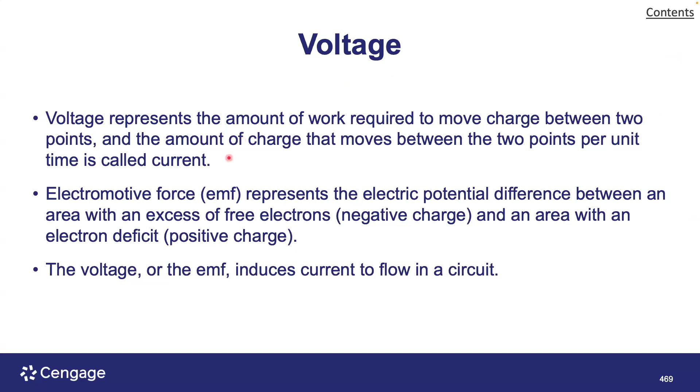If I have this charger going into a USB-C connection, that specifies a certain amount of voltage. But looking around the room at different types of computers plugged in, they may or may not be the same voltage. So we can see different kinds of voltages used for one application or another.

Direct current is the flow of electric charge that occurs in one direction. Direct current is typically produced by batteries and direct current generators. Alternating current is a flow of electric charge that periodically reverses, going positive and negative. The time interval between the peak value of the current on 2 successive cycles is called the period.

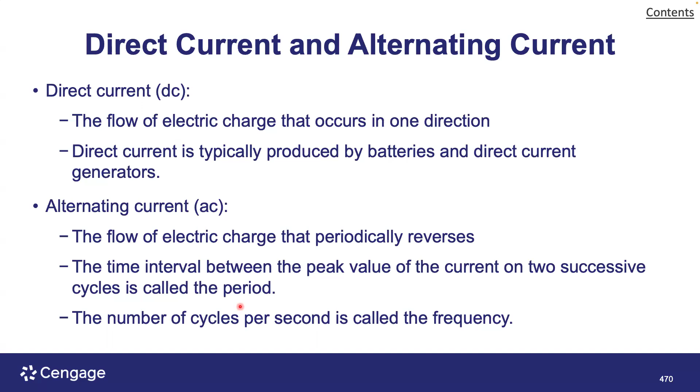Does anyone know what the frequency is for AC electricity here in the United States? It's 60 hertz. Anybody have a guess what it might be in Europe? They actually use 50 hertz. That just gives you an example of some of those numbers, and for this audience it's okay that those aren't known.

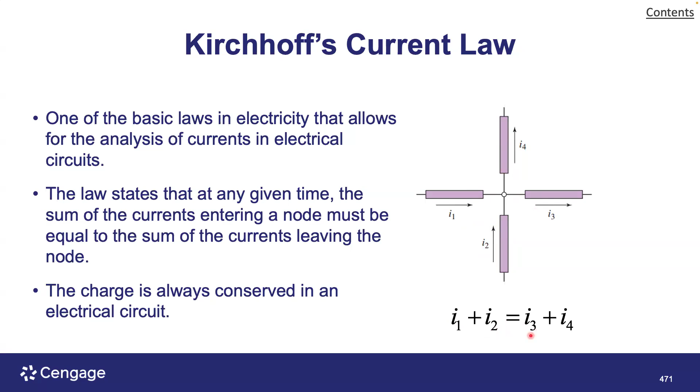I'm just going to skip over this. Basically it's showing the conservation of current. If you go to an intersection, I1 may not be equal to I3 and I2 might not be equal to I4, but these combinations would be the same. So that's just a little bit of information about that.

In terms of electrical circuits and components, here are examples of some you might be familiar with. I think everybody's seen wires, even if they're just in the background in your home or computer. A switch, so you can turn things on and off; when I come in the room, I turn the light switch on. Outlets are where you plug devices in; I plugged my laptop into one.

I mentioned resistors and capacitors; those are common. There's also the inductor, another component with another set of characteristics on how it handles current. A resistor resists current. When you turn the water faucet on higher and higher, there's less resistance, so more water flows. The higher the resistance, the more it prevents current flow, like turning the faucet off.

A capacitor stores charge. I tried to give an illustration of what that might look like here. So what was that?

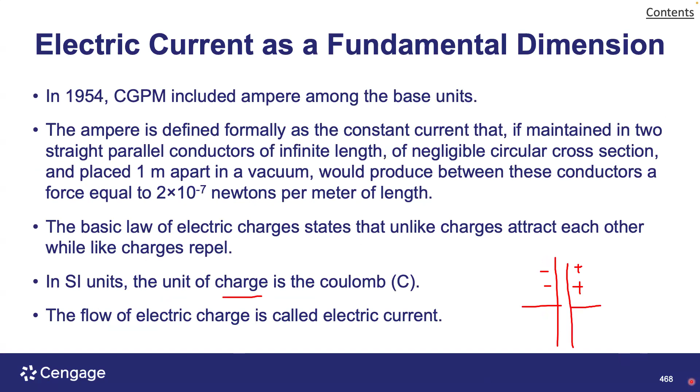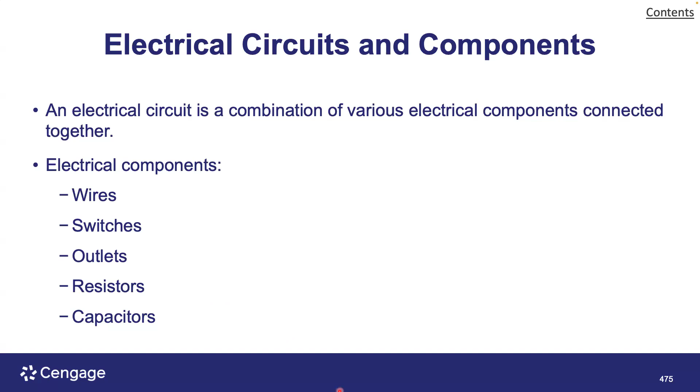Just trying to show you two plates, and it doesn't necessarily allow current to flow, but it stores it up. When you have alternating current, what that does is it's trying to go one way, and then it's going to store up on one side, and it's going to go the other side, and it's going to store it up in the other. So it's actually going to have some interesting characteristics in terms of what it's going to do overall.

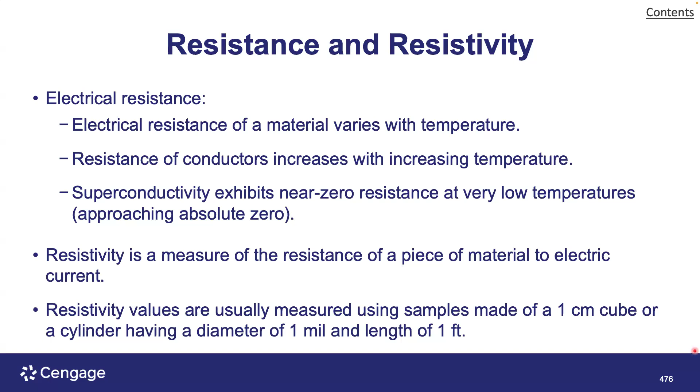So I already gave you an idea of thinking about resistance. And so just think of it resists. That's the key part of this, is resisting what is allowed in terms of the electrical current. And the general relationship for this is, I'm used to having it V equals IR, but V equals RI. R stands for resistance, I stands for current, V stands for voltage. And so that's the relationship between those ideas.

There's something called the wire gauge. And so maybe like an 18 or 24 gauge, really small, getting to larger wires. And so this is just the system in which they specify different things. So if you had some home improvements, the contractors would have to go and use different gauge wires for different things. And so if it requires a lot more current to go through it, that wire is supposed to be bigger so it doesn't overheat. It has the real estate, if you will, to be able to handle that.

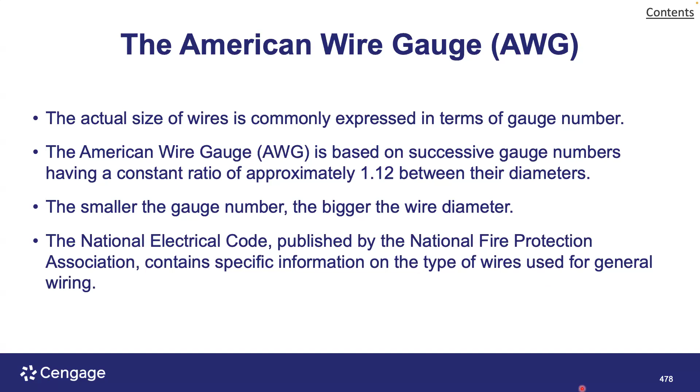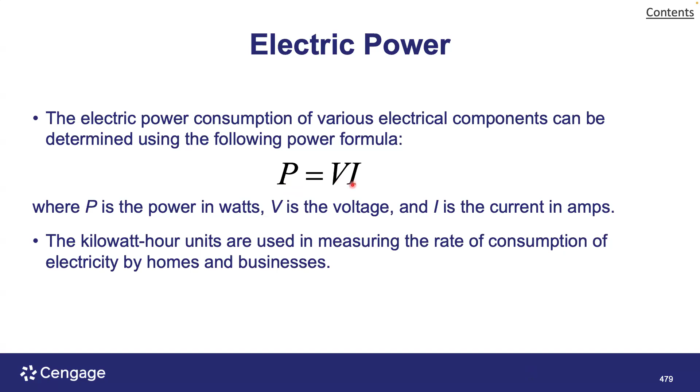There's also electric power, and the relationship is power is equal to voltage times the current, VI. And so that's another relationship that's out there. So basically, this is something that we all use, going from our cell phone to our appliances. And now my wife and I have a solar and battery system in our home, a solar power system.

Kilowatt hours is another way of talking about power. It's power times amount of time. And so it's energy. It's just telling how much energy is utilized for any particular time. So the annual electrical consumption is somewhere between 4,000 and 10,000 kilowatt hours for a typical home in a year. And so if you break that down, that can give you what it would be on average for a day.

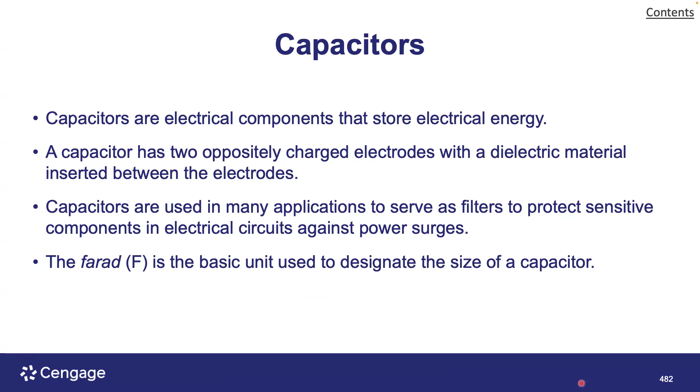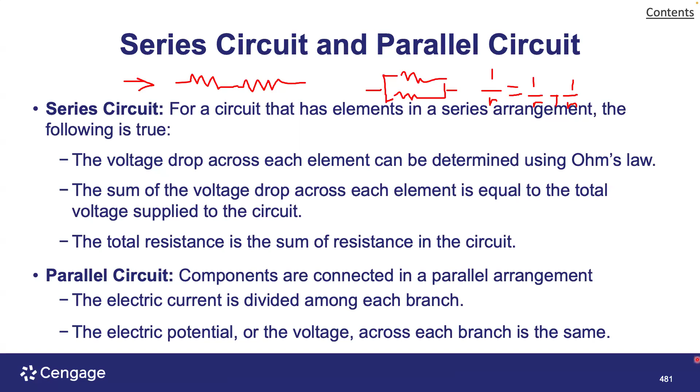Capacitors, they store charge. The farad is a unit that's used for that. So this just gives you another example. For the folks that are computer science, you probably aren't going to bump into this, but I'm just trying to give you a sense of the types of units and things that we have in this chapter. So what I showed you, the difference between series and parallel here, is for resistors. It's the opposite if I was to show you that for capacitors, but I'm not going to get into too much detail. So maybe just think about it at a higher level.

And so if I was to try and think of things in our home, let's say, for example, I have a refrigerator, I have an air conditioner, and any other device you want to say that I would include for giving you a sense of what I'm trying to talk about here? What's a common device that you use that you might want me to put down here? Anybody want to give me an idea?

TV? Okay. So what happens when you go to the power company is all of these things are in parallel. So that means that the total resistance is less with these three things being in parallel. So it means it's going to draw more current. That's the idea, giving you a sense of what's going on. So thus, we can see the impact of putting things in parallel.

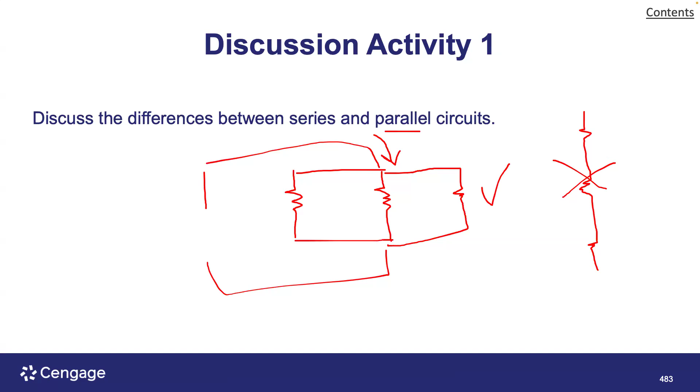If I put them in series, what's going to happen is these things aren't going to work because each one needs a certain amount of voltage for them to work. And so it's going to get smaller and smaller and smaller. And so if I think like a home application, that's not going to work. But if I have the ability to get more current to come through this, and the power company has it available, then this is an example of something that would work. Does that make sense? So just wanted to keep things at a higher level to be exploring that.

So what about electric power sources? First of all, batteries. I see most of you guys are on battery power with your laptop. So the battery is using a chemical reaction to produce the energy that you're using for your computer. And so guess what? Over time, it's only good for so many hours. And then it's going to just shut down your machine, or it's going to give you a warning a little bit before that says you need to recharge.

So the circuits create paths for the electrons to flow. Okay. And so it's trying to mimic, at least for a laptop, when you're plugged in, the same as when you have it going on battery. When it's turned off, there's no path. And so there shouldn't be any reduction in the power for the battery. But since it is a chemical reaction, they will start to discharge a little bit over time. If you've ever had a laptop in your closet for a while and you pull it out and you haven't used it for a while, it's still going to lose some of its charge. So it's chemical compounds. All of those are the things that are part of a battery.

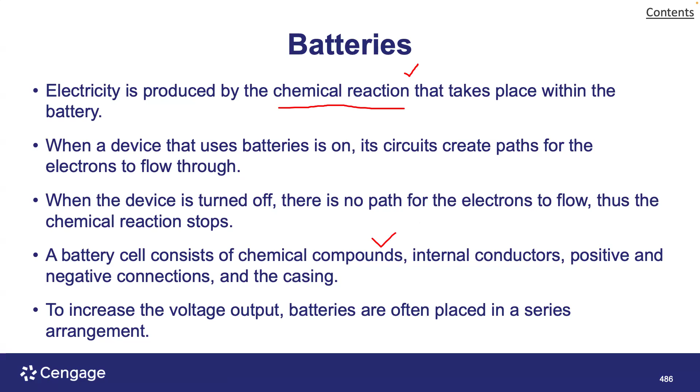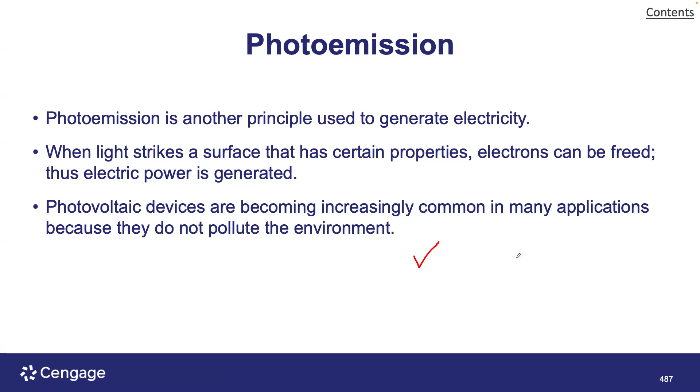Photoemission. So just think of your solar panels as an example. So when the light hits the surface, it engages with the solar panels and it starts to produce a current. And this is something that can be used to operate a home. Like that's what we have. And so during the day, we get good solar production. Then as it gets towards the evening, it starts to go down and eventually you run out. And so you either have to use things from the power company, or what we have is a battery and a solar panel combination that we could literally, if we wanted to, go off the grid.

There's other forms of energy, wind energy, turbines. It's common in different parts of Europe where they have steady trade winds. And so they just take advantage of that. Different places in the United States, they'll have wind farms that are utilized. For folks that are near a river or a dam like Hansen Dam, and there's overflow, they're trying to maintain the level of water, so they do let some water through, and so they can actually generate electricity by having that water pass through turbines. Those turbines are connected to a device that produces power from that.

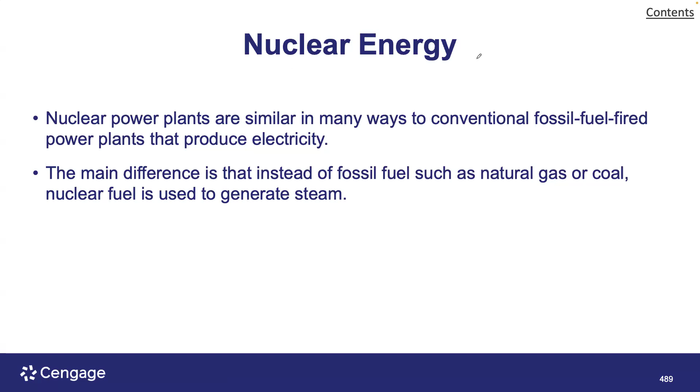And plus there's power plants. So water is used in steam power generators to produce the electricity. So they warm up the water that goes through these turbines and it produces electricity. Finally, nuclear energy. There was a power plant between San Diego and Orange County, and they just recently started the process of decommissioning it. It can actually take a long time to decommission it. So the San Onofre plant, if you've ever seen that, in front of Camp Pendleton. So those are a couple of different types of energy that are available.

Wind energy is a form of what? Anybody have an idea? Yeah. So you're turning a turbine and it's generating electricity. Okay, electric motors. So motors drive many devices and equipment that make our lives comfortable and less laborious. Some household appliances with motors are refrigerators, garbage disposals, microwaves, I mentioned TVs.

So microwaves with a turntable, stove hood with a fan, it goes on and on and on. And so there's different types of motor types. Selecting a motor for an application depends on several factors, including the speed of the motor, the power required, and

the type of load. The duty cycle: manufacturers of motors classify them according to the amount of time the motor needs to be operated. The motors are generally classified as continuous duty or intermittent duty.

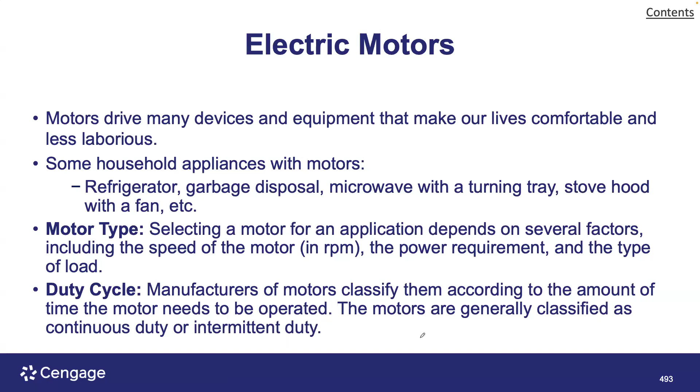So let's play this video and then we'll have a discussion about it and see if you have any observations from what you saw. So this is about the Tesla cars.

Anybody seen a Tesla car running around as you drive? They're quite common here in California. And so go ahead and play this.

This is Nikola Tesla, the greatest inventor of all time, and this is his greatest invention, the AC induction motor. In the early 21st century, modern inventors like Elon Musk started putting these AC induction motors into electric cars. From this, Tesla Motors was born.

Elon Musk's Tesla has been constantly improving on that century-old design, from their Model S to the Model 3 and on to their next generation electric car that has yet to even be released. This is how Tesla reinvented the electric motor.

The AC induction motor is a product that goes back to the early days of Tesla Motors and the development of their first roadster vehicle. But in the grand scheme of things, the induction motor actually tracks its origin back to the early days of the Industrial Revolution. Alternating current is the kind of electricity that surrounds us on a daily basis. It's what comes out of the sockets in your wall and moves through the power lines up and down your street.

Nikola Tesla is widely considered to be the father of alternating current electricity and was a pivotal figure in adopting AC to power the US electrical grid around the turn of the 20th century.

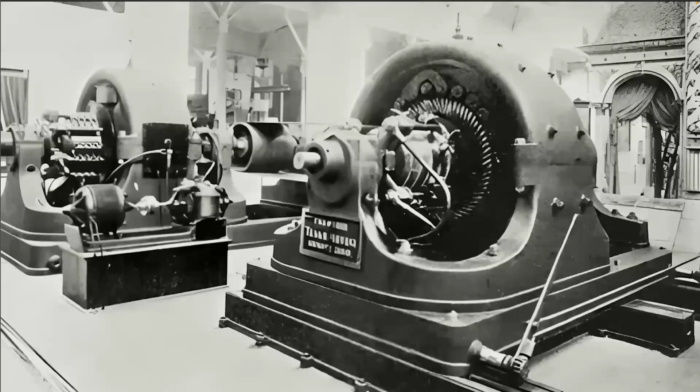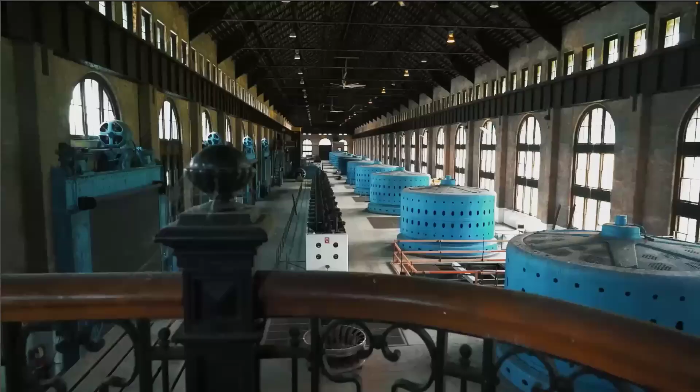Many people consider Tesla's greatest invention to be the alternating current induction motor, essentially a device that will transform AC electricity into mechanical motion, and in turn, when used in the opposite direction, an induction motor can turn motion into electricity. One of the first large-scale applications of Tesla's AC generator was capturing hydroelectricity at Niagara Falls.

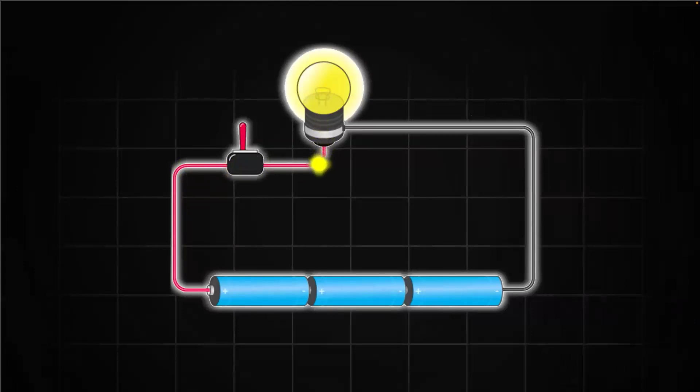When we say alternating current, we are really talking about the direction that electricity is moving through a circuit. So for AC electricity to work, the direction of the electric current has to continuously alternate between forwards and backwards. This is a bit difficult to imagine in the context of our own electrical grid.

As far as we can tell, electricity flows out of the generating station and into our house, but in reality, it's in a constant state of movement back and forth. This is a characteristic that allows AC electricity to be transmitted at high voltages over very long distances and then converted into lower voltage for final delivery to the consumer.

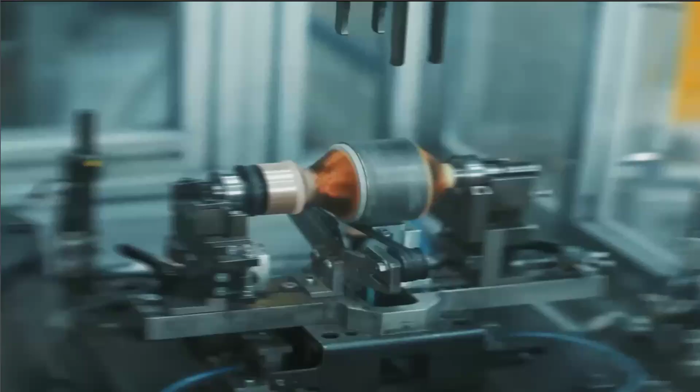The alternating flow happens so fast that we only perceive the electricity as constant, but in reality, the direction of electricity alternates 60 times per second in North America. So how does this apply to electric motors? Well, it's all about magnets.

So when you transmit electricity through a conductive material like a copper wire, you also create a magnetic field in that wire. This is an electromagnet, and once you stop the flow of electricity, the magnetic field will also dissipate.

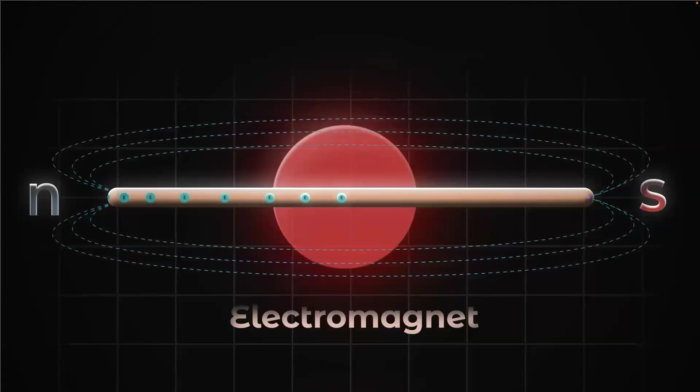Now, if you transfer electricity in one direction through a conductor, you create a magnetic pole, either a south pole or a north pole. And then if you were to reverse the flow of electricity through that same conductor, you would also reverse the polarity of the magnetic field. So as the direction of electricity alternates, so does the north and south pole of the electromagnet.

There are two essential components of an electric motor, the stator and the rotor. The rotor rotates and the stator remains stationary. Easy way to remember which is which. Now, as the name suggests, an induction motor uses a rotating magnetic field in the stator to induce a rotational force in the rotor. Here is how that breaks down.

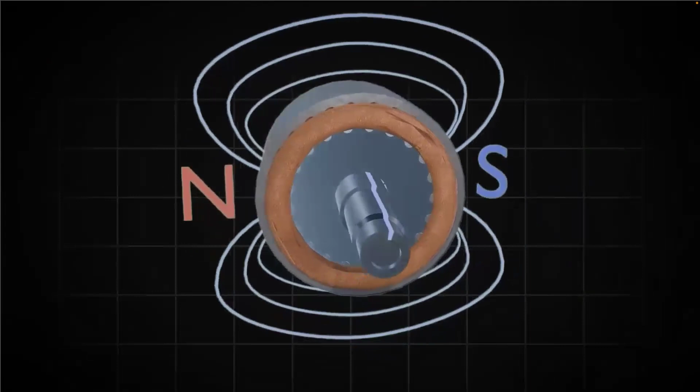Your stator is essentially a ring of copper wire that is arranged into coils that run from the front to the back of the motor. Each coil of wire is wrapped around a piece of iron, so when electricity is flowed through the coil of wire, it becomes a powerful electromagnet. The polarity of each magnet is determined by the direction of current.

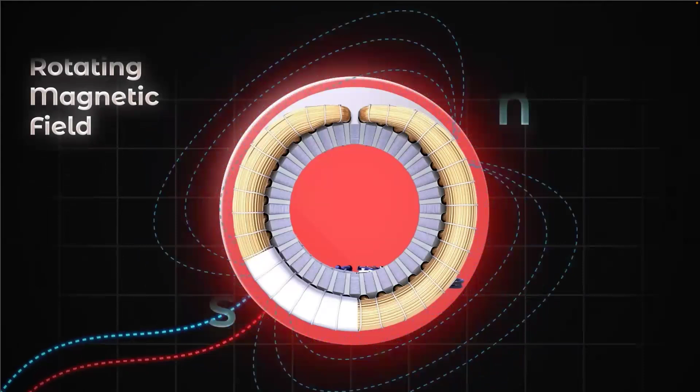So by alternating the directions of the electrical charge being applied to each subsequent winding and flipping each polarity in sequence, we create a rotating magnetic field that travels around the ring of the stator. The speed at which the magnetic field rotates can then be controlled by the rate at which you can alternate the flow of electricity.

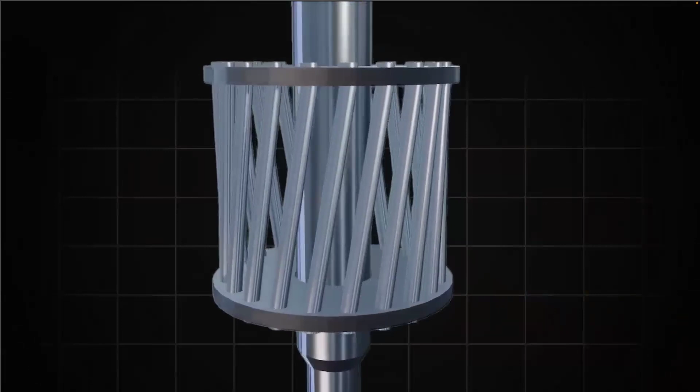The rotor in this case is a much more simple component. There are various different kinds of rotors used in different induction motor designs, but the one that we are going to focus on today is known as the squirrel cage rotor. It gets the name because the structure is a cylinder made from aluminum bars that run from the front to the back of the rotor with circular metal end caps.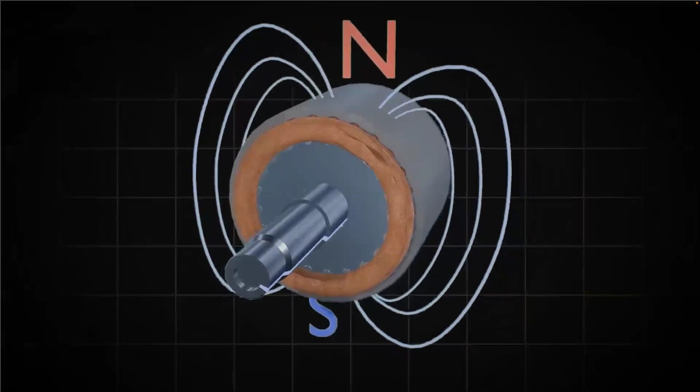There is no supply of electricity flowing into the rotor, and it contains no natural magnets. It's literally just a metal cage that can freely rotate, and yet the rotor can be transformed into a magnet by the rotating magnetic field of the stator. One of the interesting things about magnets is that as they move relative to a conductive material, they can induce an electrical current into that conductor, which in turn creates an electromagnet with no contact required, just relative motion. You can see this by dropping a magnet straight down a copper pipe.

As the magnet falls, it will induce a magnetic field into the pipe, which will then work against the magnet itself and slow the fall of the magnet through the tube. So the further it falls, the slower it will move due to resistance from the induced magnetic field in the copper pipe. The same thing is happening inside the induction motor. By rotating the magnetic field around the stator using alternating current and electromagnets, a magnetic field will be induced in the bars of the squirrel cage rotor.

That induced magnetic field will react against the magnetism of the stator. We know that magnets with the same polarity will push against each other, and this force of magnetism will cause the rotor to turn in the direction of the stator's magnetic field. So the faster you alternate the flow of current through the stator, the faster the rotation of the magnetic field, and the faster the movement of the rotor due to the magnetic push effect.

The only caveat we need to remember is that the rotor will have to move at a slower rate than the rotating field of the stator, because the magnetic field is created by relative motion. If the two are turning in sync, then there's no longer any of that motion in play. The rotor will demagnetize and slow down.

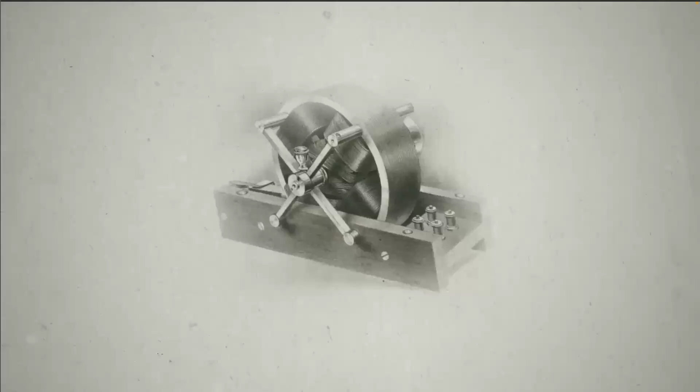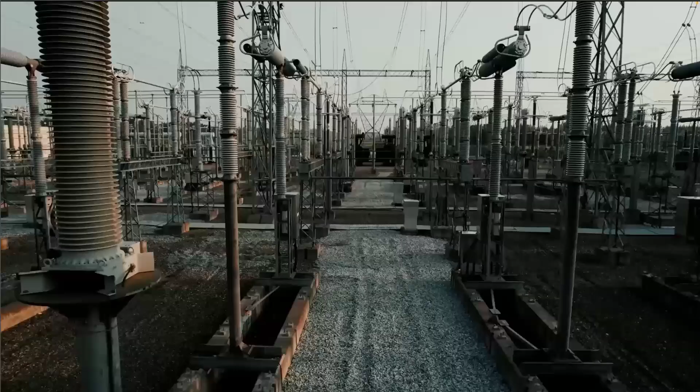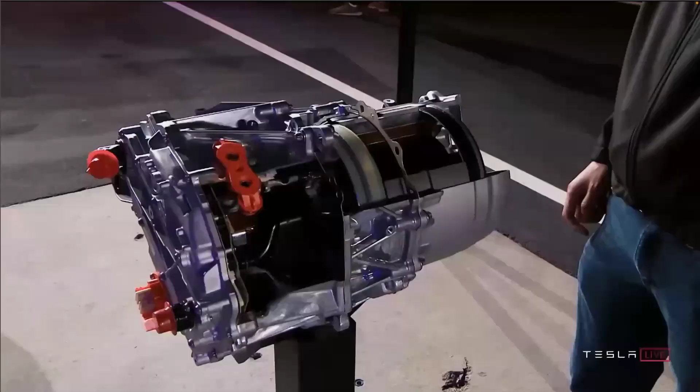From the time this induction motor was first patented by Nikola Tesla in 1888 to the present day, AC motors have been a staple of industrial society. We see them in everything from elevators and streetcars to ceiling fans and washing machines. Anything that plugs into the electrical grid and spins is more than likely to have an AC induction motor inside. So when it came time for Elon Musk and his crew of founders at Tesla Motors to choose a power source for their first electric roadster vehicle, there was one very obvious candidate, the AC induction motor.

And when used in an electric vehicle, the design gives you one significant advantage. We know that when you rotate the magnets of the stator faster than the rotor, you electrify the rotor and create a magnet. But when you spin the rotor faster than the stator using an external force like a wheel, you electrify the stator, which can then transfer the excess energy back to the battery pack and increase the driving range of your vehicle. This is how regenerative braking works.

Tesla retained the AC induction motor as their primary drive unit into the Model S and X. This allowed the relatively large and heavy vehicles to achieve mind-boggling feats of acceleration from a standing start, but they also came with a significant drawback that needed to be solved. So the beauty of the AC induction motor is its simplicity. Coils of copper wire, some chunks of steel and iron, a squirrel cage of aluminum bars, not much to it. And that's exactly why the motors in appliances like air conditioners and washing machines can run for decades without failure.

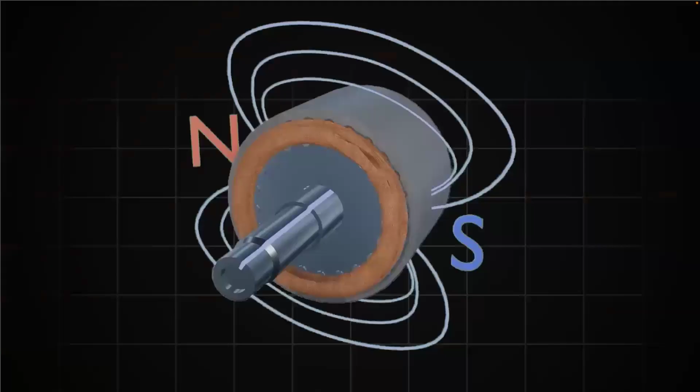The downsides of the original induction motor start to show themselves only when you go in search of maximum power and efficiency, which is exactly what Tesla was looking for when they designed their Model 3. Okay, so everything that we just talked about still applies to this new motor that Tesla created for their Model 3, but with one key addition: permanent magnets. Specifically, they added permanent magnets to the rotor.

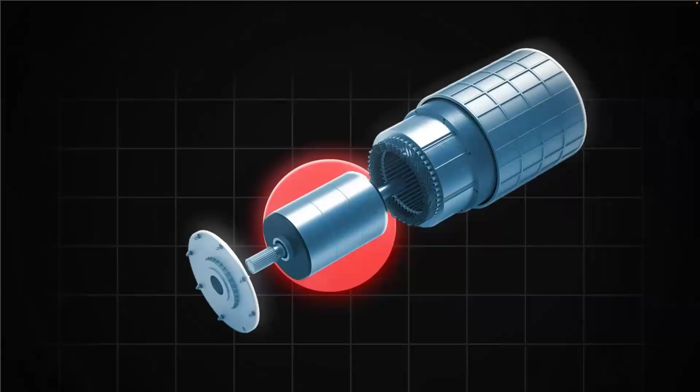So now, instead of an aluminum squirrel cage, we have this dense iron core filled with strips of a magnetic rare earth element called neodymium. The technical name for this new motor type is IPM-SynRM. That means internal permanent magnet synchronous reluctance motor. It's complicated. Here's the scoop. You could make a permanent magnet motor by taking a metal cylinder, sticking 4 magnets to the outside with south poles on the top and bottom and north poles on the sides.

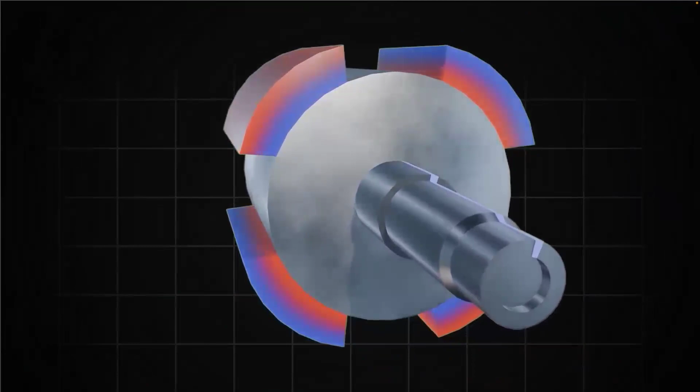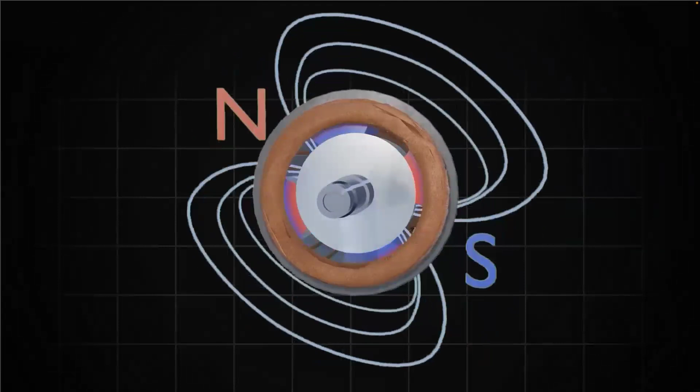That would be your rotor. And then when you stick that inside the stator that we talked about before and start rotating the electromagnetic field in the stator coils, your permanent magnet rotor will follow. Now we can actually spin the rotor at the exact same speed as the rotating magnetic field of the stator, because we are no longer relying on relative motion to induce the magnetism in the rotor.

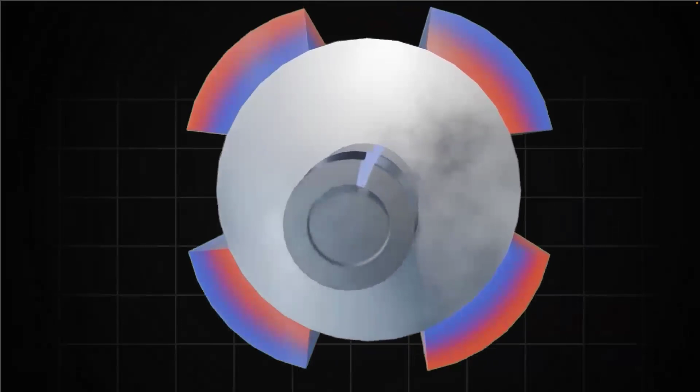This already gives us higher efficiency and more power, particularly when accelerating from a stop, because we have these two very powerful magnetic fields that can instantly push off from each other. But there's a big problem. Two problems, really. For one, permanent magnets stuck to the outside of the rotor will have a tendency to come unstuck due to centrifugal force, so the faster the rotor spins, the more likely it is to fly apart.

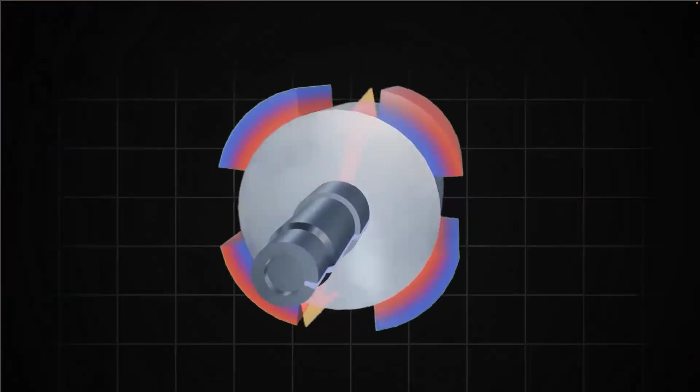But even more importantly, reason two, is that the rotation of the permanent magnets will start to induce their own magnetic field into the stator coils at high speed, and this is going to be opposite to the electromagnetic flow in the stator, and that force is going to want to slow down the whole system. This is called back EMF, and the faster the rotor speed, the more back EMF you get. To combat these two downsides, we introduced the design of a reluctance motor.

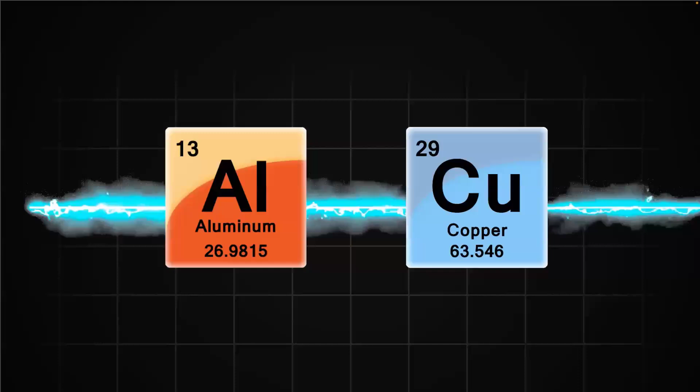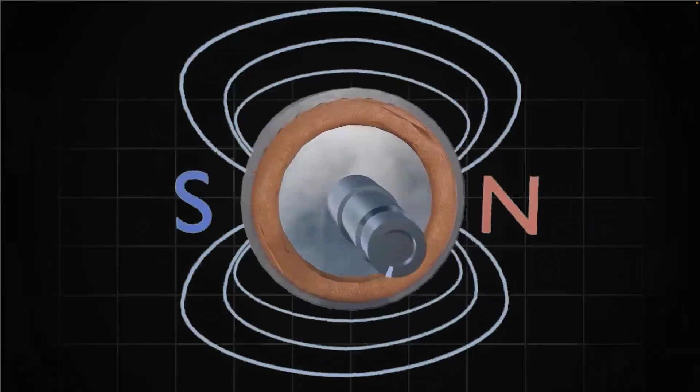So aluminum and copper are only magnetic when you flow electricity through them, but iron is naturally attracted to magnetic fields. So that means we can use it as a rotor material inside our same old electromagnet stator, and that iron rotor will follow in sync with the rotation of the stator's magnetic field. Again, there is one caveat. We need to cut channels into the iron material that line up with the shape of the magnetic field that surrounds it. This will align the magnetic reluctance of the iron core with the magnetic field of the stator and allow them to rotate in sync.

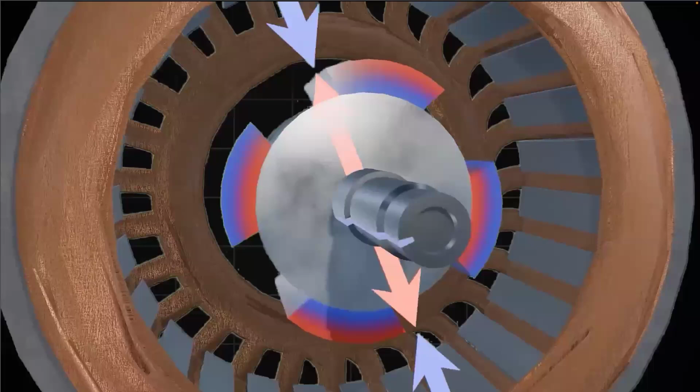This is our synchronous reluctance motor. It's a very efficient motor design, and it works very well at high speed because there is no back EMF created by the iron rotor. The downside here is that a reluctance motor has very low power density when accelerating at low speed because the rotor can only follow the rotating magnetic field of the stator. You don't get that instant push effect of two magnetic fields working against each other.

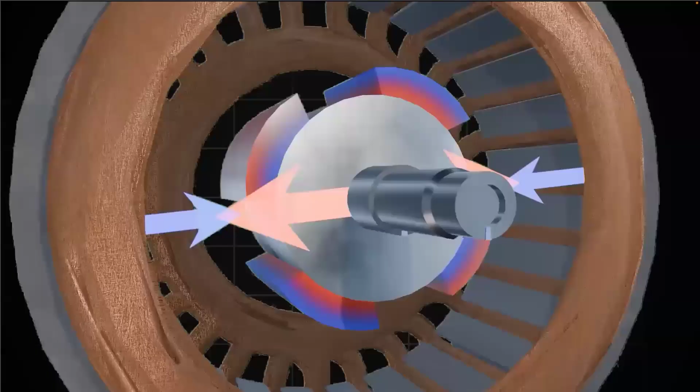Now, all we need to do is add magnets to the rotor and we get our perfect combination. Those channels that we cut into the iron core make the ideal location for our permanent magnets to live. This is our internal permanent magnet. By placing them inside the iron rotor, we reduce the permanent magnet's effect on the stator windings and thereby reduce the problem of back EMF.

Now, there is still a very complex task here that involves balancing the reluctance effect of the iron core with the magnetic push of the permanent magnets. You see, you want to utilize the power of permanent magnets during acceleration, but then cancel them out and switch over to the efficiency of reluctance at cruising speed. This is all handled by very advanced software controlling the magnetic field of the stator that we cannot even begin to explain. And this is why the IPM-SynRM motor was never widely used until Tesla came along. And now Tesla is about to take this design to the next level.

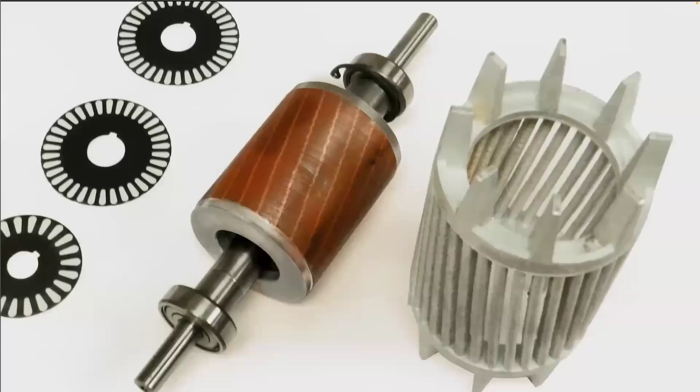With the motor design for the Model 3, Tesla was able to maximize both power and efficiency, but it did come at a cost. If we remember back to the original induction motor, it came with a relatively simple and cheap rotor made of aluminum bars. By switching to IPM-SynRM, Tesla introduced the rare earth element neodymium into their rotor. So the cost in this instance is money. It's a much more expensive motor.

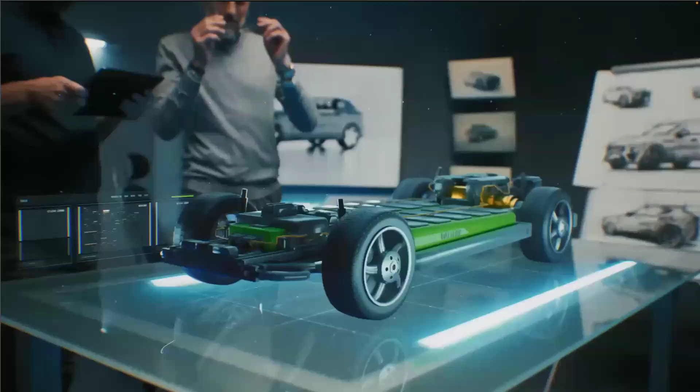Now Tesla is dedicating their research and development into a next generation vehicle platform that is supposed to dramatically reduce cost while maximizing efficiency. This will serve as the base for their upcoming robotaxi vehicle. From what we learned last year at Tesla's Investor Day, the designers are achieving much of that cost reduction by eliminating rare earth elements from the motor's composition.

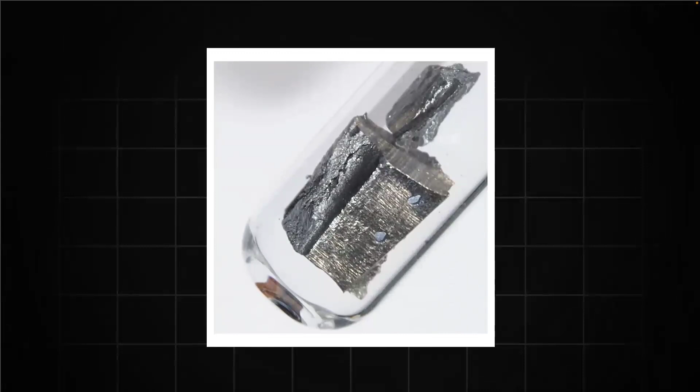Now, it's not that neodymium is particularly scarce in the overall composition of the Earth, but it is difficult to locate near the surface, and you typically won't find large concentrations all in one place, so therefore the cost is relatively high, and the supply is relatively low. But engineers still prefer neodymium for electric motors because it has a strong magnetic field that won't degrade over long periods of use.

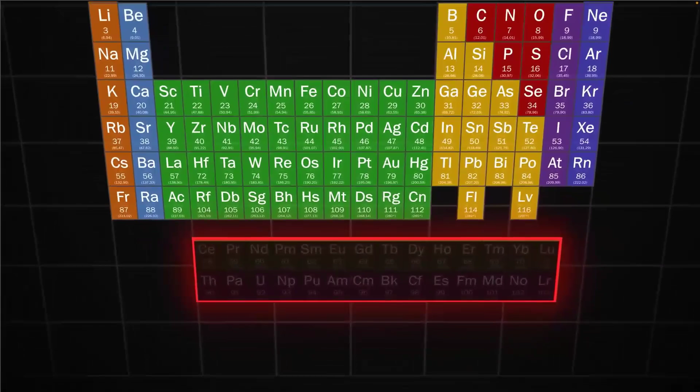So it does justify the cost. Now, Tesla is saying that they can get by without the need for any rare earth elements in their new magnets. So what will they use instead? A widely popular material for making magnets is called ferrite. This is a ceramic material of mostly iron oxide, also known as rust, combined with additional metals like manganese, nickel, and zinc, but it doesn't particularly matter which one.

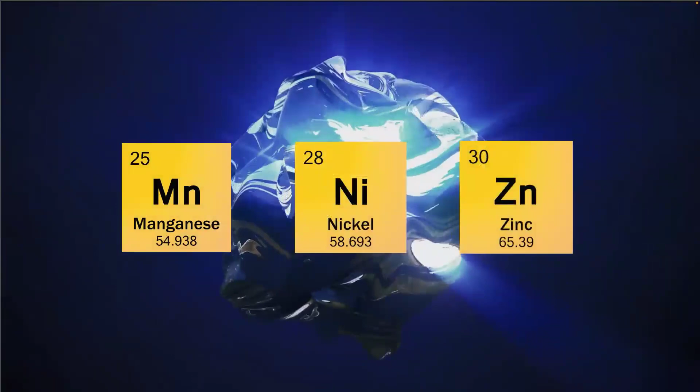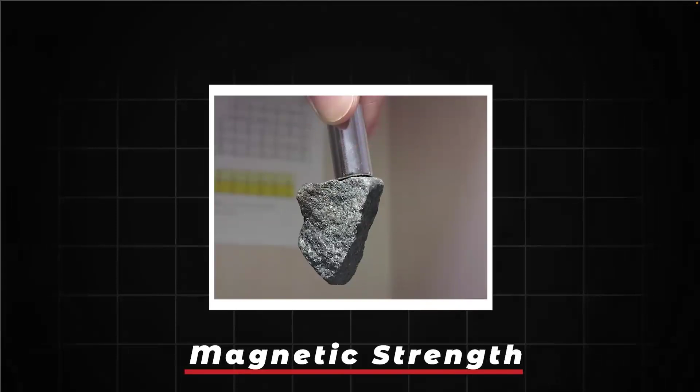You'd find ceramic ferrite magnets in everything from speakers to electric guitars and cordless drills. They also help keep your refrigerator door closed, so it's a very common and affordable material. The downside of ferrite compared to neodymium is magnetic strength. You would need a much larger quantity of ferrite to match the strength of a neodymium magnet, and there's not much extra space to go around inside an electric motor.

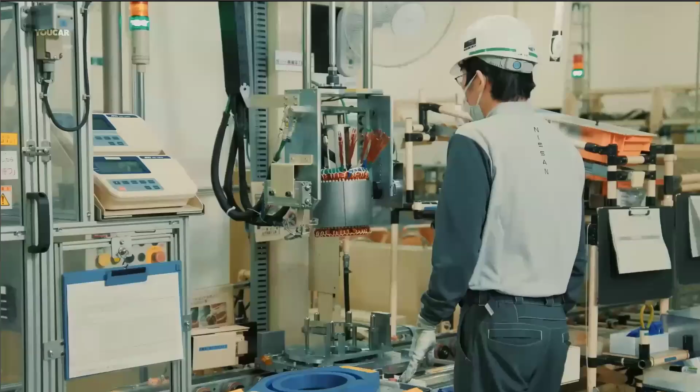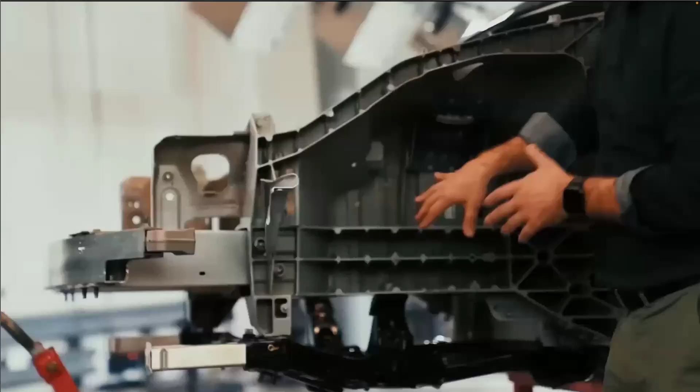We know that Tesla can make some of this back by increasing efficiency. They've done that in the past. Just in the time between Model 3 and Model Y, the engineers were able to reduce the amount of rare earth material required for the electric motor without sacrificing any power. But inevitably, by switching over to a ferrite magnet, Tesla will lose some performance in their next-gen vehicle. So now, instead of going 0 to 60 in 6 seconds, it might take 8 or 9 seconds.

Okay, well, I hope that was interesting. Maybe the engineers or the nerds will really love that. Others might, maybe not so much, but anyway, why don't we just think about that? So, how many people found that useful? How many people not so much? Okay, so a little bit of a mixed reaction, but mostly interesting.

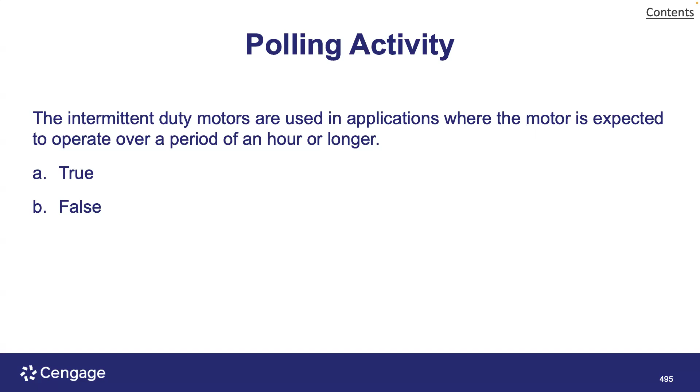Some of you might like what Elon Musk is doing, he's an entrepreneur. And so just leaving it at that, it is interesting to see what he's doing, trying to make a better world. And he's been doing interesting things with technology, and I'll just leave it at that for the purpose of our conversation. So there's just one more topic that I mentioned a little bit earlier, and that's in terms of lighting systems.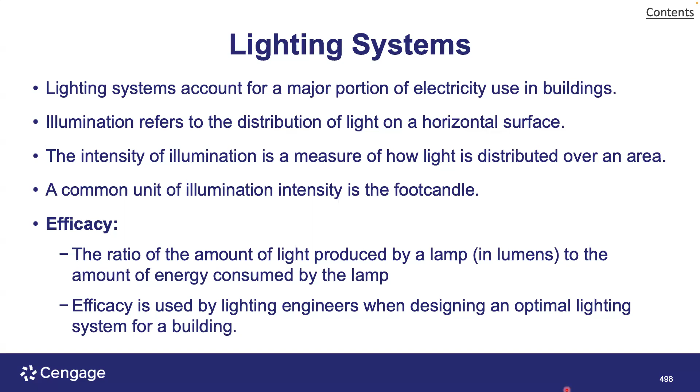Lighting your home, lighting a business of operation, a school. All of these are places where illumination is something that needs to be thought about. And so if you had lower power illumination that had the same amount of light being generated, that would be a good thing. And a common unit of illumination intensity is something called the foot candle. But that's just something that I won't get into too much detail, other than to say that there are standardized units out there that we use.

But there was also this color rendition index, the CRI, that I was mentioning. So I mentioned incandescent light bulbs. And so it's kind of like having a campfire, if you will, that has some of that richness, or the sun. And so it might actually make your complexion look a little bit nicer when you're taking pictures versus other types of illumination. If you had it with neon lights, you might look a little bit more greenish or something.

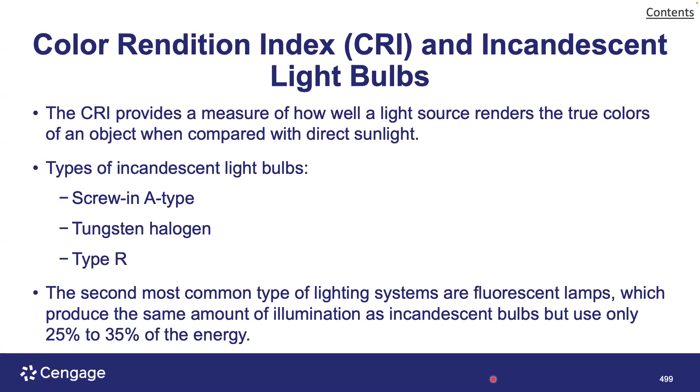And so those are just things that can be thought about. But these are things that can be corrected, either with your camera, or you can correct the light source so it has a more even spectrum. And those are the kind of things that are available to help with this color rendition index. Any comments or questions on what we covered? That's just a quick synopsis of this chapter as we're thinking a little bit about electricity and its various elements that come into play.

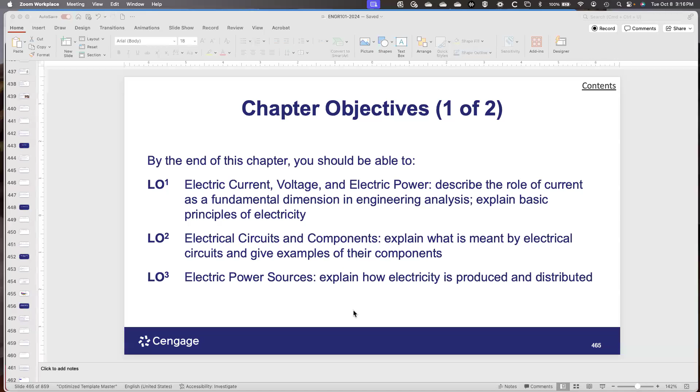Okay, well, let me finish up with this one and talk more about our project-related work. I've started to introduce another source of material that I think is useful for us to have as part of our discussion. I will remind people that what I'm trying to do is make Tuesdays more of a time for conversation. So I am keeping record of who is in class so that we can credit that appropriately, because I want to have that dialogue and create a sense of community in our time together.

So let me just go ahead and review a little bit of information of what we've covered from this other source. The way that I'll do it is I'll go back to the beginning here and just talk about it this way. So the way that this textbook applies, getting us an overview of engineering and computing, is it talks about what engineers do, elements of engineering analysis, some fundamental elements, force and motion, energy and economics. So we've had some things to talk about that in the way our textbook is oriented. Then they have chapters on specific parts of engineering and computers.

And so if it turns out that any one of you are interested in one particular area, this can be one of the things that we can spend a little bit more time on. I wasn't planning to do that. And then last time I did chapter 19, where we did an introduction to engineering design. And so what I'm going to focus on today is design teams and why that's important.

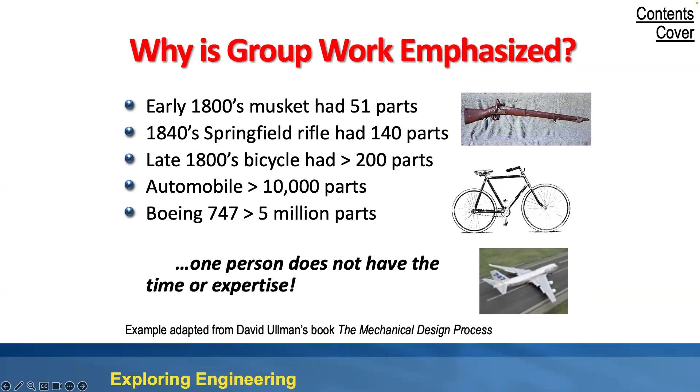Well, here's another part of why it is useful to work as a team. I've never worked on firearms, but back in the 1800s, a musket had 51 parts. Just to give you a perspective. A rifle later on in the 1840s had 140. A bicycle has greater than 200 parts. That's as of the late 1800s. An automobile has over 10,000 parts. And then you think of an airplane, the Boeing 747, has more than 5 million parts. And so no one person is going to have the expertise for all of that. So it's definitely something that we want to be mindful of and to be working together as a team.

We're working on some project works. Even though we're doing it individually, I'm trying to encourage people to comment on what other people are doing, maybe make some suggestions or recommendations. All of that is something that would be beneficial for us to successfully do our projects.

So for a team, you need to have a common goal. So maybe as a team, or at least my goal for us is to have everybody do well in this class, to have an enjoyable, successful experience. You need to have leadership. Oftentimes you need to have a person that's speaking for the whole group. That's something where that comes out.

Each member makes a unique contribution. So who does what? You want to have effective team communication. I'm trying to promote good communication, having you guys give me feedback, and also try and be engaged with your projects that you're doing. Creative spark. I think as a result of some of our conversations, we've had a little bit more illumination for projects and clarification, and hopefully making it more interesting for you.

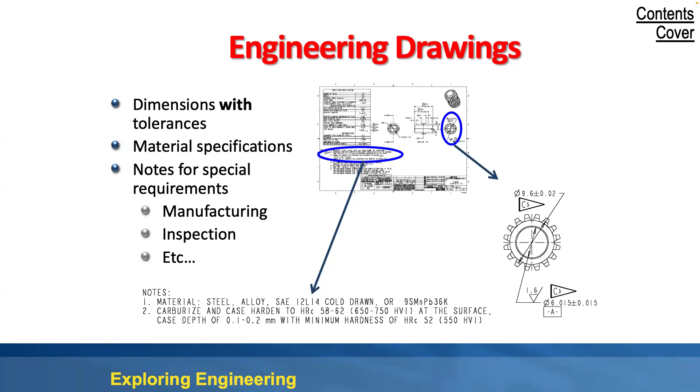So I already mentioned having a bill of materials. This is beyond the focus of our class, so I won't really focus on that. So successful projects meet 4 goals: they're within budget, they meet specification, they're on time, and they have client acceptance. That's the goal you're trying to reach with your project work.

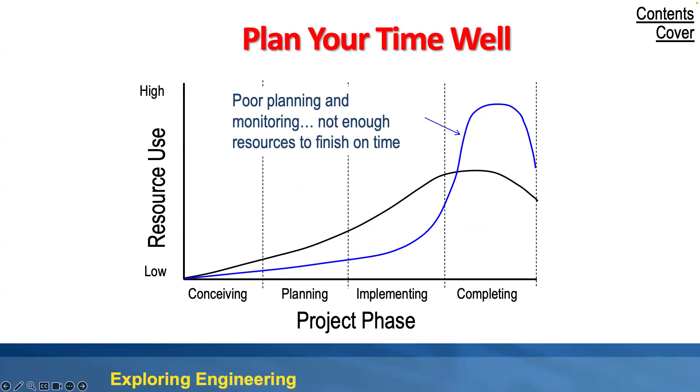Plan your time well. This is where it can be deceiving. You really need to put a lot of effort in at the beginning. A lot of my career has been in systems engineering. You're trying to find issues as soon as possible so you don't get way to the end, where it's really costly to retrofit. The cost to change over time gets greater and greater, and the ability to change becomes less and less. Those work against you both ways, and you want to prevent that.

So examples of project management tools: a statement of work. That was your proposal. What is it that you're going to be doing? Then a work breakdown structure, a list of tasks to complete. We didn't have that for this, but if this were actually monetized, that would be required. What are the responsibilities of the various individuals? That's something you would have to capture.

Project management tools: you would need a PERT, a program evaluation and review technique, which is a graphical review of task flow, what leads to what to get you to the point where you finish. Critical path is taking that PERT chart and finding the longest path, the thing that's going to stretch out the schedule the most, the thing you need to make sure you cover.

And so that's what you would have that is part of your project management. And a Gantt chart, and this is another tool, is having a schedule that shows you what and when they start, when they finish, and what leads to what. And also having something called a percent complete matrix: when you're done, you're 100%. When you start, you're 0. And so what is the percent complete on these various tasks that need to come together for you to have success?

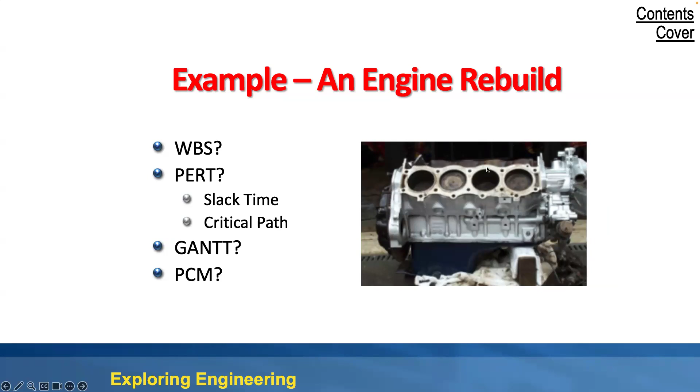So if you're doing it on your own, you could probably handle that. If it's you taking it into the auto shop, you probably want it back by tomorrow. And so that may or may not be possible, depending on how long it takes them to get the parts and to work through each of these items of this schedule.

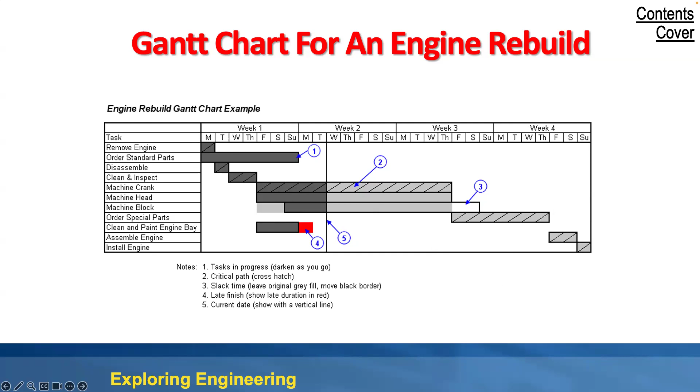So for the schedule, it's using daily and long-term calendars. What do I need to do today? What are the things that are longer term, and what are vital? What are important? What is optional? You need to make sure you do all your level A components. The B would be important. C, you fit them in whenever there's time, and so you want to keep those in balance.

So using a planner is a beneficial thing to be utilizing, having daily prioritized things as well as a calendar for longer term events. Well, I'm just going to go back to the contents, go back to the section that's covering these steps here. We've talked about 2 of the several steps that we have. And I'm just going to now open it up and see if anybody has any comments or questions on this. Let's see if we can try and relate this with the rest of the time that we have to our project work. And we can focus a little bit more on this on Thursday.